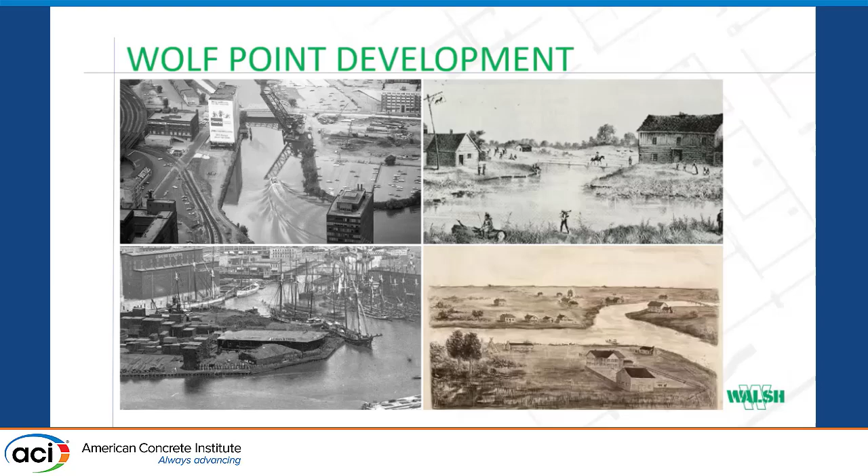And it was a tavern and it was a port. So that's where they would bring a lot of the materials into Chicago. So ironically, one of the first areas developed and also one of the last areas. Here's another circa 1893. Fast forward to 2005. Land is owned by the Kennedy family, President Kennedy's family. They partnered with Hines to turn essentially what was the parking lot into a much larger development.

So this was the kind of rendering of what they started with. Comprised of a 4-story underground parking garage on the north side, which you can't really see. The building on the left is Wolf Point West. And then on the right side, Wolf Point East. And then dead center in the middle was Salesforce Tower, which the case study revolves around. I've been there for Wolf Point East and the Salesforce Tower, so the two right towers.

A couple key partners: Hines and the Kennedy family, developing partners. Pelli Clarke Pelli designed the facade, if you will, of the river and most of the buildings downtown. HKS was our architect of record, MKA structural engineer, and obviously Walsh is general contractor and concrete.

Quick synopsis, I know this is about Salesforce Tower, but for Wolf Point East, just to give you an idea: 660-foot tower, 60-story residential building, over 50,000 yards of concrete. It's a cast-in-place PT structure typically, mild reinforced slabs. For the Salesforce Tower, about 840 feet, 58-story office building. This is a structural steel, slab on metal deck concrete building. Ironically, there's about the same amount of cubic yardage at the end of the day, but it included 10,000 tons of structural steel.

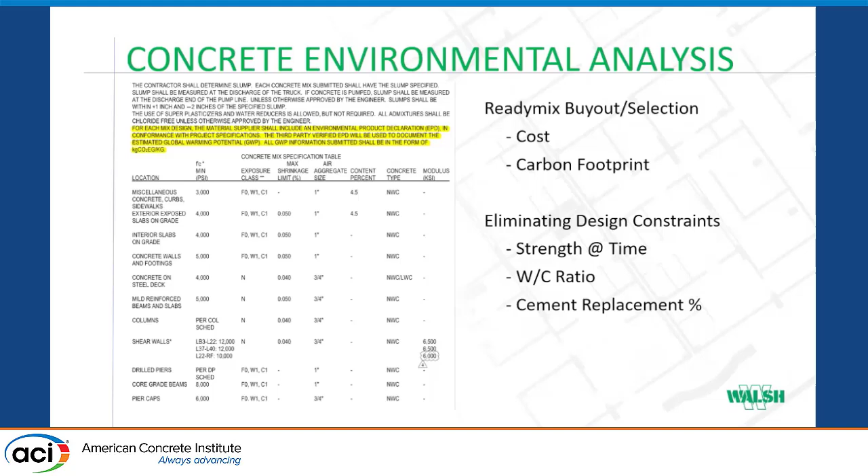For our Salesforce Tower core schedule, it's very critical. We had to pour a new core every 4 days. Talking about a 250, 300 yard pour. Quite a bit to do to try to make that time frame work. If they wanted us to reduce it further, we were able to.

Between Athena and then Climate Earth, we were able to develop a cost analysis saying, for instance, our 27%, we could have achieved 42% if we were to remove a lot of the cement out of the core wall mix. I actually had to use a combination of 4 different admixtures, which added a significant cost too. So, really allows us to play around with this.

The good part is that a lot of the development that we did on this project, same Excel software, if you will, of tracking these different types and what if I do this or what if I do that? You can do it real time. So we can do it during bidding phase. We can tell you, here, if we can go to a 4-day cycle instead of a 3-day cycle, this is the mix we can use to reduce production.

As far as some design implications here, just some design criteria of the job. The building was a podium, a concrete cast-in-place podium, 2 levels, with typically 76-foot caissons down to hardpan. And then in the main core itself, around the perimeter steel columns, we had 15-foot bells.

In the center of the building, underneath our core walls, we actually had nine 10-foot diameter caissons, 8,000 psi, with 1-inch thick casing all the way down that came out as one piece. Then we actually socketed about 10 feet into the bedrock itself to prevent uplift from affecting the caissons.

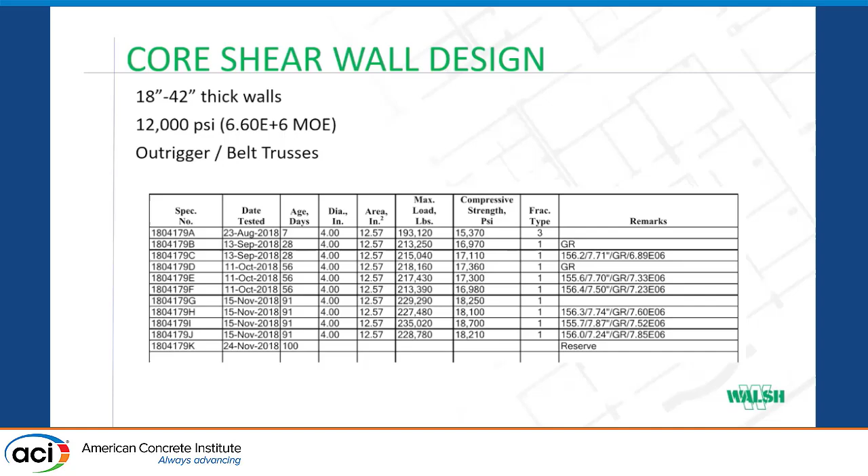From a core shear wall design standpoint, again, their big push on MKA was high EMOD, so high elasticity to it, but a very brittle but very strong core wall to handle some of the lateral pressures. To give you an idea of the kind of general design, there's a few different ways in Chicago that we typically will support the lateral design, either with upsizing the core, which obviously can have some detriment.

We are able to use essentially a stilt option. So the good analogy I've used in the past is it's kind of like a skier. You're skiing, your legs and body are the core wall, and you have your ski poles. Essentially upsize the exterior columns, as you can see in that second photo from the left. They act as the poles themselves, and then you have these large outrigger systems that come off of the core out to those exterior areas, essentially widening the core footprint about 3 times what it normally would have been.

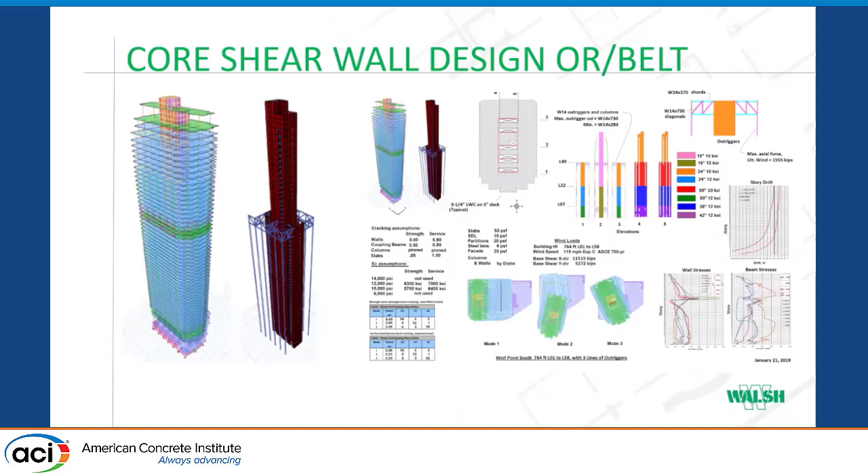And it's mainly for serviceability in these high rises. So there's actually minimum area steel required for the core wall design, except for a couple minor locations. They were able to achieve that with this kind of lateral system. And then this is a cross-section of what that lateral system looks like. So you have these 20,000-pound embed plates, the ones in green, that are cast into the core wall, and they extend out to the outrigger trusses. So you have a truss running left-right, and then up and down at each of those highlighted locations to really stiffen that upper floor.

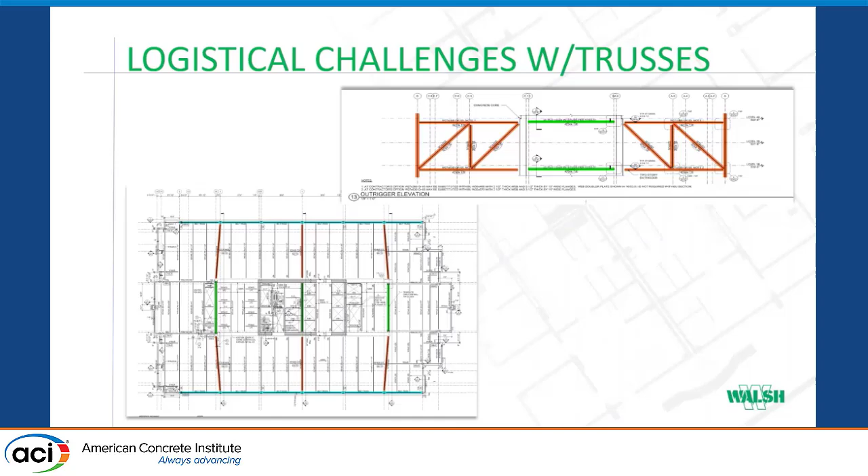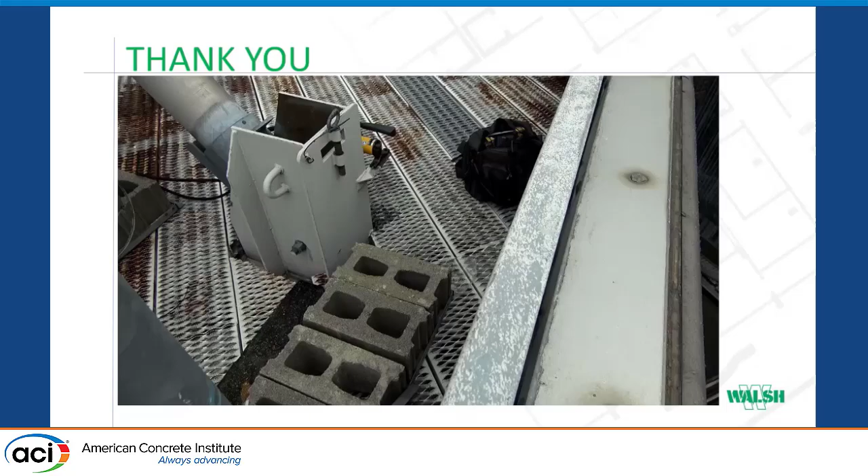Here's an example of that kind of tie plate. A quick time lapse of the building.

So I know I kind of ran through it. Wanted to leave time for Q&A if there's any questions about any of the EPD tracking along the way. I know it's kind of a cumbersome process of back and forth, so if anyone has any questions.

Thank you for an excellent presentation. So you mentioned that it was a requirement to use EPD for this project. If there wasn't any requirement from the owner, do you see any incentive for the contractor to use EPD to appraise their own performance or save money or time?

That was a good question. As far as the EPD production itself, it doesn't do any good for us to present. I mean, it doesn't hurt us, doesn't help us, it is what it is. We've been providing EPDs since I've been in the industry, for about 9 years. My first project, essentially it was a very reduced version of what this is now. But the last two projects, the Wolf Point East one, we provided an Athena aggregator's self-declared EPD. And then the next one, we provided the Type 3 Climate Earth certified EPD. It's no skin off our backs to provide it or not provide it.

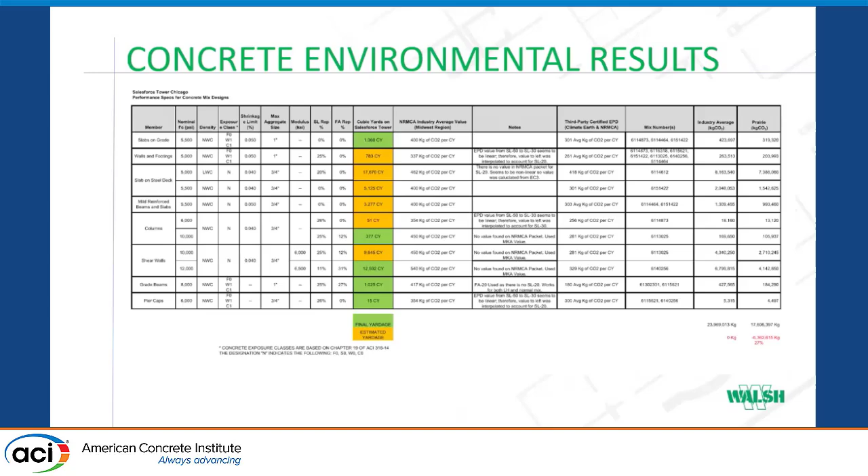Did the use of the lightweight concrete impact the crane picks for the beams that you didn't need to put in had it been normal weight, and how was that accounted for? Sure. Yeah, that's a great question. So for steel erection in and of itself, from an estimate standpoint, from a cost standpoint, everything comes down to picks. Every beam out there, I don't care how big it is, how small it is, gets picked by the crane, piece by piece. It has to be installed piece by piece.

You're not going to pre-assemble a floor and then set the whole thing in place, especially given we have a whole set of elongation discussions here. So everything's a little tilted if you build the building like this and let it settle down over time. So every single piece is being brought from upwards of 1,000 feet down on the slab all the way up to where it's being set, then gets installed. So any excess pieces you can eliminate helps it out. It's taken into account in the bid.

Simple answer. If we were to add an additional beam, you have 15 beams, it would take one tier or two floors to add another day to the schedule. So you're looking at $40,000 a day for a steel erector. You'd be adding millions of dollars. So if you can eliminate and make those longer spans, it does help on schedule and on cost from the steel erection, in addition to concrete.

One other interesting thing, while we're talking about this, that we touched on but didn't really cover. We had 10,000 tons, so initially I'm sure you've all heard concrete is the biggest global warming potential discussion on a building. That was my understanding early on. After this process, I realized that's kind of not true. If you isolated just our tower footprint, eliminate the concrete podium, even keep the concrete foundations, the global warming potential in the steel was almost identical to the kilograms of CO2 in the concrete itself.

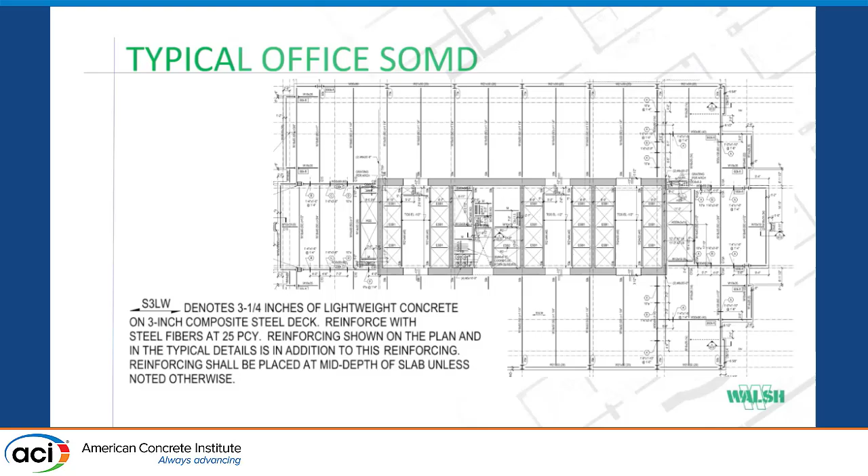So we drill holes on the north and south sides of our site, dig down, and we build a concrete bulkhead wall. It's about 4 feet thick, and then we bury it. So the tunnel's still there, but there's no way to access it. If you were to get under, say, McCormick Place, not all of them are capped, but most of them. So yeah, we ran into two of them.